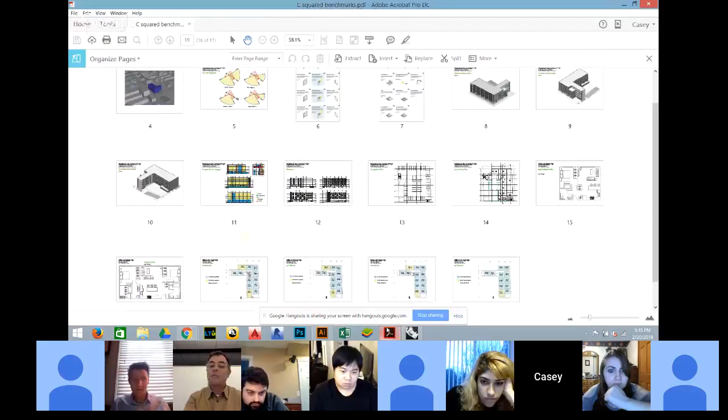So Caitlyn and Daniel are not muted. Can anyone hear me? Yes, you can hear me? Nathan can. Okay, I just don't know why my mic is saying I'm muted. But if you can hear me, that's good. I'm having trouble hearing Mark though. You're muted, correct? Mark is muted, yeah. Yeah, I can't hear Mark. Should I mute myself then? Yes.

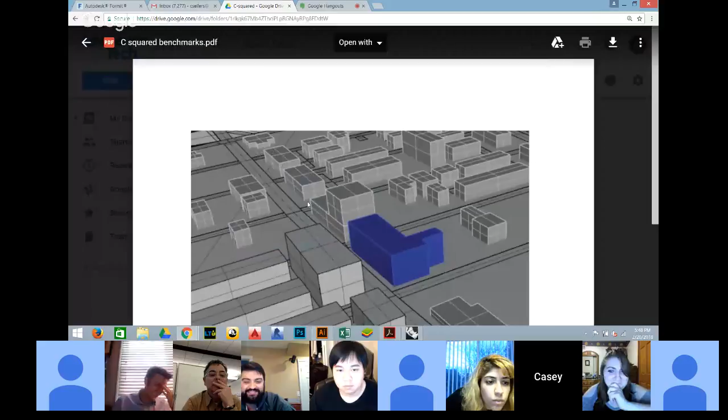Hello? There we are. Is anyone talking right now? I can't hear anything. Whoever is presenting should be unmuted, but their sound could be turned off. Casey has his presentation shared right now on his screen, but nothing. So he should be unmuted. Oh, did somebody mute him? Is he actually? Yeah, he's going through the slides. My, well, bad, we're going to start over. I think we got it. We can hear you now.

Start back, where am I at? Okay, so this is the conversation about how we wanted to lay out our building. What we decided was that we wanted a strong face on John R and Alfred, and then also a courtyard that the residents can use on the southeast or southwest side. So the most logical thing was to start off with an L-shaped building.

This is the initial mass model that we did, and going from there, we did a series of sun paths that show when the courtyard would be illuminated, when the east resident would get the morning sun. As I said, but no one heard, this is all in Revit, so it doesn't take into account buildings on the east side of John R.

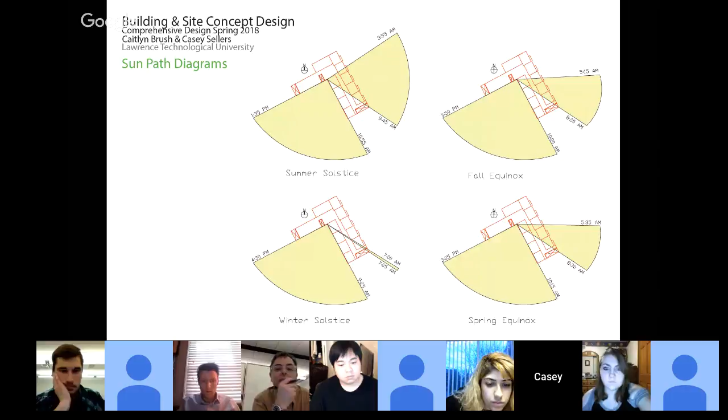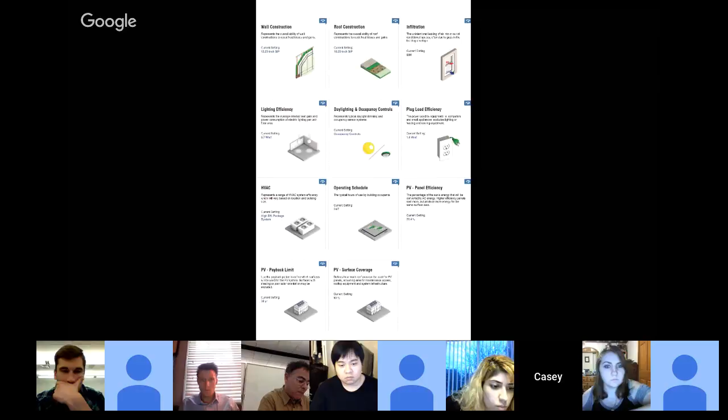These are 3 different axonometric views of our building. This is from the corner of John R and Alfred, this is Alfred, and then the residences on the west side, courtyard, and you can see the parking on the ground floor.

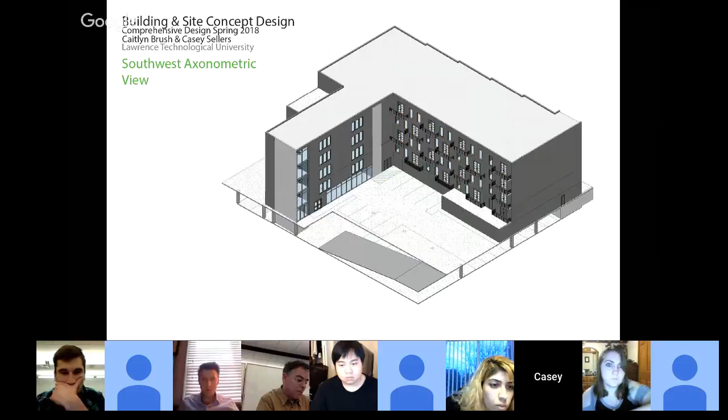And then these are elevations that I made from Revit that show the fenestration on each side of the building.

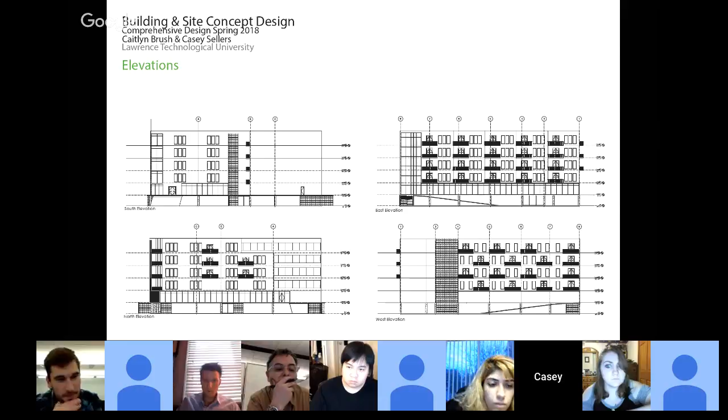And floor plans - this would be the garage floor plan. It's one-way, and there's 45 spaces in this. I didn't update this, but the columns on the west or east side of the building are in the middle of parking spaces, which I didn't count when I got 45. So there's 45 here, and as you saw earlier in the axon view, there's 8 on the ground floor - a total of 53 spots.

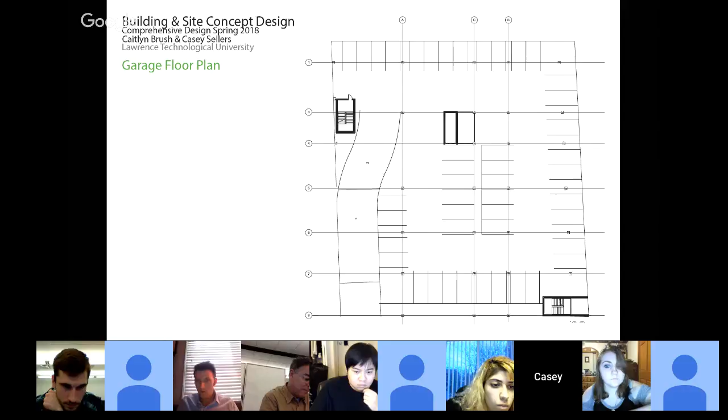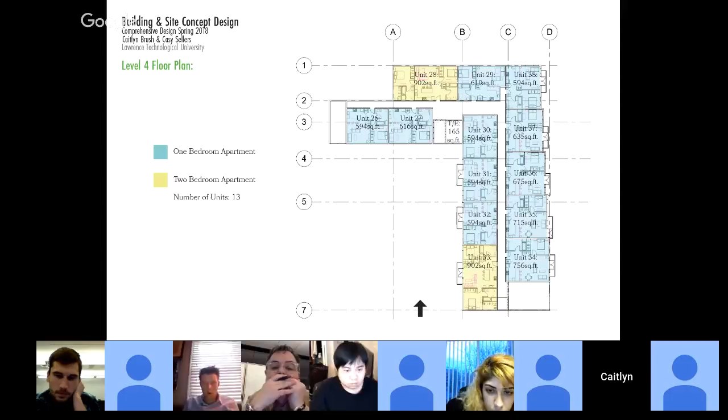This would be the 3rd floor with the dog washing again in the kind of armpit area of the floor plan. This is the 4th floor with the telephone and electrical space again in there. And then this would be the 5th floor plan. And then there would be outdoor terrace space in the area where that second 2-bedroom is on each of the other floors. It just didn't show up, I guess.

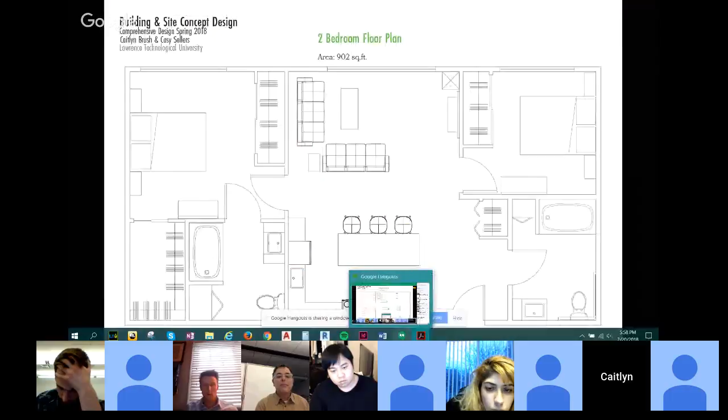Okay, so if you go back to your unit plan for a second, the 2-bedroom units, I think the bathroom door from the larger master suite should probably swing into the bathroom. Oh yeah, sorry, it is that way and all the... I feel like everything else is looking pretty comfortable, pretty reasonable. Although I think the X box that you've got, which I suspect is for your mechanical appliance, probably needs to be in its own wall construction, and that's going to have an impact on your elevations. So you need to think through the way that the Magic-Pak impacts your floor plan and also the elevations, because that's going to have a visual that's going to have to relate back to your fenestration strategy. If we go to the 1-bedroom unit, Mark,

Can I ask a quick question while we're on that? Is the lower closet by the refrigerator a pantry, or is that a hall closet? More of a pantry. Is the closet by the refrigerator a pantry or a coat closet, Caitlyn? It's a pantry, can you hear me? Yeah, it's a pantry.

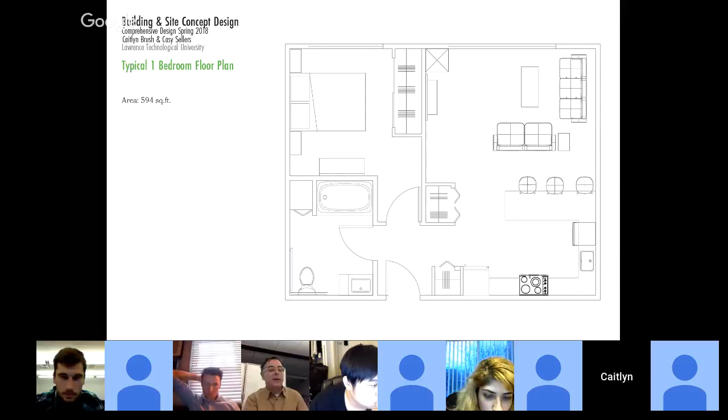As well as mechanical and fire suppression. So those are kind of next step reference points for you all to include in the planning.

And then if we go back to the overall unit plans, if we can go like to the typical third floor. So I think unit 17, can we go up one floor? 30, can we go up one floor? Yeah, level 4 or 5?

Unit 42, all three of those units are kind of crappy. Right, because, and I don't mean to be mean, but they are, right? Because you would not rent them - the bedroom is really the only room with fenestration, with outdoor windows.

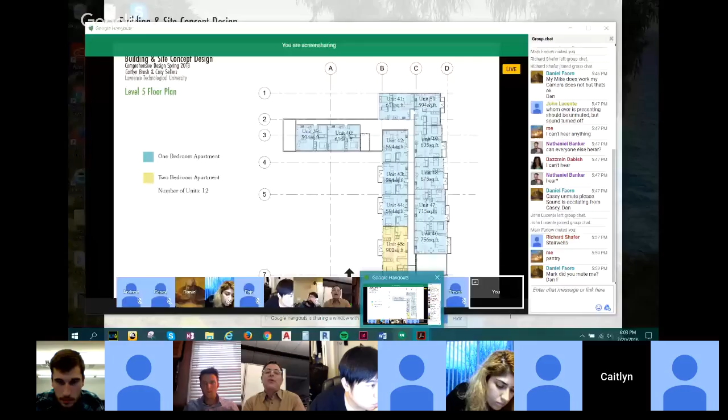Now that's not to say that we can't have a unit with only one window on the outside wall. I think we've seen, and we will continue to see, not only in our studio but in other studios, narrow and somewhat deep units.

But when a unit is chunky wide, like this one is, where we have the living realm - the living and kitchen realm - without any fenestration on it, then when you're studying that, you have to say, is that really a desirable unit? How can I make this work more effectively?

So maybe unit 42 is a studio unit, right? Or maybe it slides south and unit 45, for example, is a smaller unit. So those are the kinds of tests and examinations that as architects you'll go through.

I appreciate this as a snapshot in time, but I want to make sure that you see this as a red or yellow flag. And if you didn't catch this, or thought maybe we can talk about this tonight - we're talking about it, right? So I want to make sure you understand that concern.

Are you comfortable with that, Caitlyn? You follow what I'm saying? Yeah, no, I totally agree. Yeah. Mark - also, yeah, go ahead, Dan. I'm sorry, having trouble with my mic on and off.

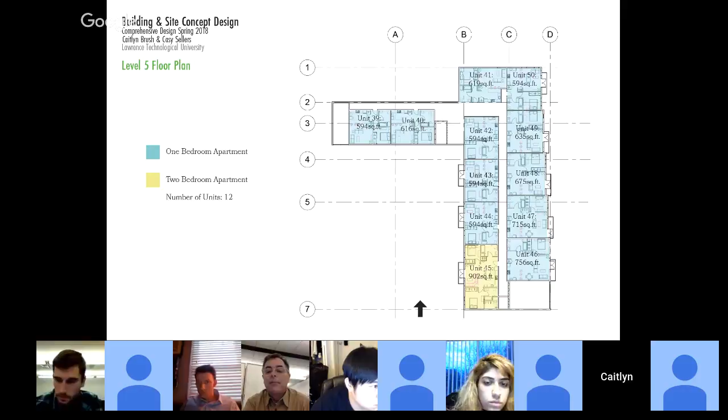Also maybe some diagrams might be missing right now for what the ADA requirements are for accessibility—in the elevators, or in public single-occupant toilets that you're indicating, or stairways, those kinds of spaces. I'm not seeing those things, and I want to be sure my inference is correct on that point. The point being that for the second benchmark, those factors will be looked for in your work. So make sure you're alert to that.

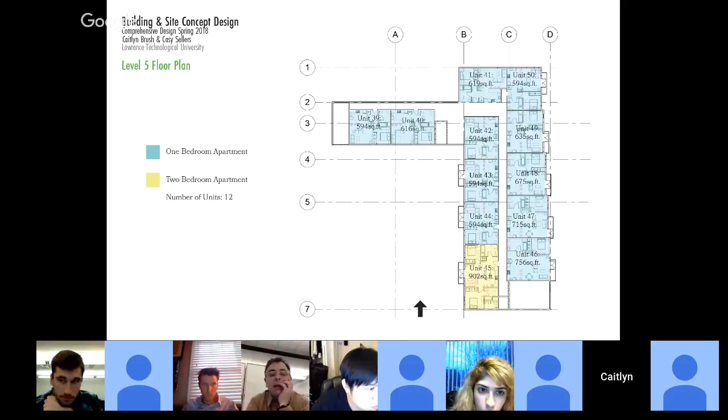I definitely appreciate the 3D sketches, but I'm wondering if there's maybe any other—I also appreciate the way Casey begins the presentation. If we can go back perhaps to that first plate—do we have to go back to you, Casey, to do that? Or can Caitlyn run it back to the very beginning? Yeah, so I appreciate this first drawing, thanks Caitlyn.

But it's not really clear how this form comes to be, and I feel like you need a set of diagrams that parse out the thinking that led you to this L-shaped conclusion. Can you move us to the very first plate? Actually, I don't think I—okay, so we can go to Casey. She does, yeah, I thought she did. Here we go.

Okay, so I think it's really important, you guys, to show a series of diagrams, and it can be from this view, for example, that show a buildable footprint that the zoning ordinance does allow for this site. So what is that volume? That volume can be this giant blue cube, and that blue cube is limited by an Alfred Street setback, and limited by a plane that indicates building height. So you should actually be illustrating with a package like this these kinds of drawings. This is not a technical kind of drawing—this is a design drawing you could have easily included here to help make your case.

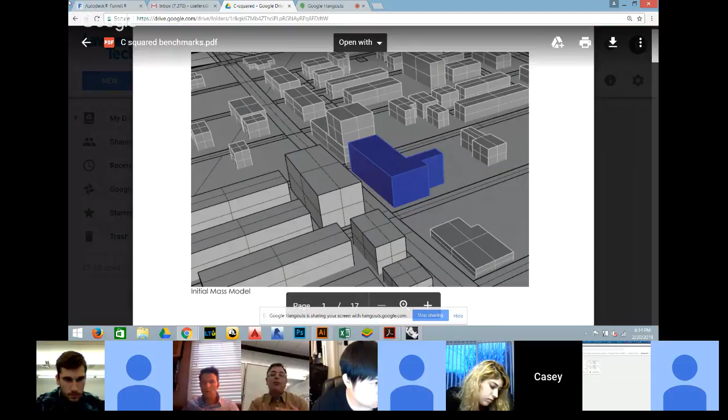And then you begin to show the variations or permutations of this drawing by showing the idea of a courtyard, letting that volume slide out of the big blue volume, let it rise vertically out into the sky, so we begin to see the benefit of a courtyard that provides daylight and opportunities for views. These are not necessarily constructional or technical diagrams, but I think they tell the story for a developer to help them understand how your idea came to be. It's really important that you start to think about your work as this logical, conclusive, step-by-step, iterative process.

Dan, do you want to make any closing remarks? We're actually sort of out of time.

Yeah, I mean, I agree with the importance of diagramming—I can't tell you how many times on a jury someone basically has to go back to the beginning because they can't understand the origin and the initial concepts that are developing the project. So if you can do that at the very beginning, and do it in a very clear way, I think you set yourself up for a good start with your presentation, because now your jury members are following along rather than saying, hey, I don't quite get this.

Can we take a quick look at that one floor plan that you showed us? I think it was a 1-bedroom unit. I have a quick question for Professor Farlow.

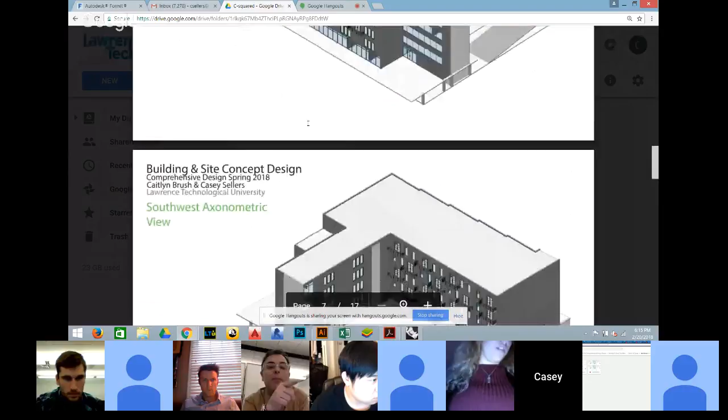That might be on hers. Oh, thanks. It's the one, right there.

My question is on the HVAC unit that's on the exterior wall. Since we're going to see this a number of times, I'll ask now: what would your thoughts have been about moving that bedroom wall further to the right, to some extent, and sliding that HVAC unit into the closet zone, so it's not chunked out of the living space? Yeah, I think that's actually a desirable thing.

Caitlin and Casey, these plans are kind of platonic, right? They're ideal—they don't show the corridor, or the relationship of this unit and its bedroom to the living room or the bedroom in the unit to the left and right. They're just pure drawings, they don't even have the balcony on them. I feel like you can contextualize these plans a bit more, because you'll want the balcony indicated on the living room, and seeing that balcony may cause you to conclude, like Professor Farrow just indicated, that the living room looks kind of funky now with this zig and zag in the corner. Wonder if there's a way the closet can swallow it, which is also why I'm interested in finding other ways of identifying storage in some of these units. So, for what that's worth.

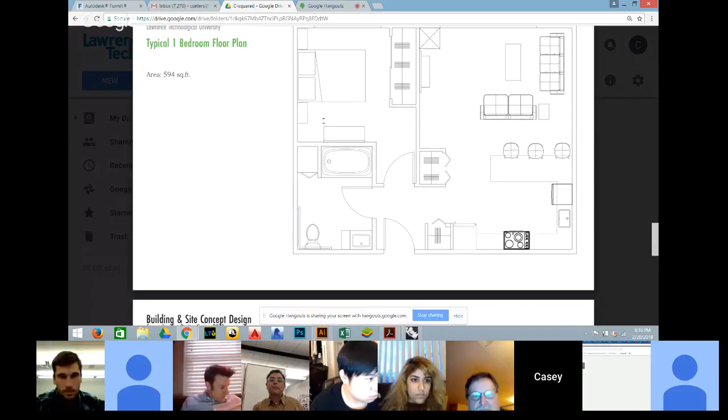That's a good suggestion. Okay, that's all I have for now. Thank you. Can we just go back to the ground floor?

It seems pretty reasonable. Some of the paint stripes need to, like at A1, run across so it's always clear that that isn't a parking place. Wherever that happens, like at A6, and so on, B7 or B3, whatever that is.

Also indicate the graphical directional arrows, everyone, and the slope of the ramp needs to have the stair cut—that line with the zigzag in it to indicate that it goes up—and note that some of the stuff in this ground floor plan is maybe programmed underneath the ramp, if there is program there.

I think the other point about making sure the A column line, Caitlin, starts on the west wall and not somewhere in the middle of the building will be useful. Make sure the doors in the lower level stairs swing in, everyone, and make sure the stairs have doors—the southeast stair does not have a door. We've talked about this before, and I had hoped you would have caught that by now. So make sure the paint is indicated, the column lines are indicated, the stairs are provided with egress doors, and also make sure that—

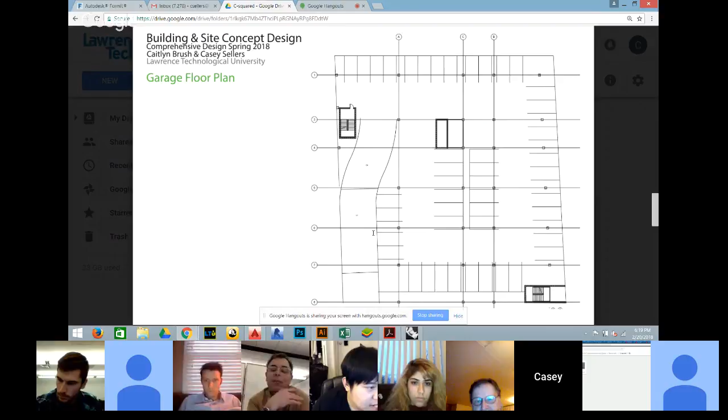And maybe—I know you guys are working these drawings out at, like if this was in AutoCAD, it might be in an LT scale of 48, because this is a quarter scale drawing.

It's really hard to read the nomenclature of the drawing, like A and 3 and so on. So just double the size of those column bubbles so we can read them, or override them.

Also, they're not correct because there's a column that doesn't have a bubble, as pointed out. The column on the far right-hand side without the bubble, my concern is that's going to be in a location where the car door opening is going to be a problem. They may wind up hitting the column when they're trying to open the door. Does that make sense?

We've talked about that before. And I think there's probably a generator down here, unless you located it on the first floor. Okay, thanks. Let's move on to the next group.

Thank you. Who's next? Me and Andrew. Who's going to lead? I can present, or screen share. And we do have a copy of our slide in the folder as well if you wanted to look at it by yourself. Thanks, Andrew.

Okay, so here's our proposal. Ready? Okay, go ahead. I'm Dazzmin, and that's Andrew.

So basically, as you all know, the amenities provided within this space include some exterior green space, about 50 residential units, underground parking for them, attached storefronts, and then the fitness center, which we're incorporating for residents and non-residents.

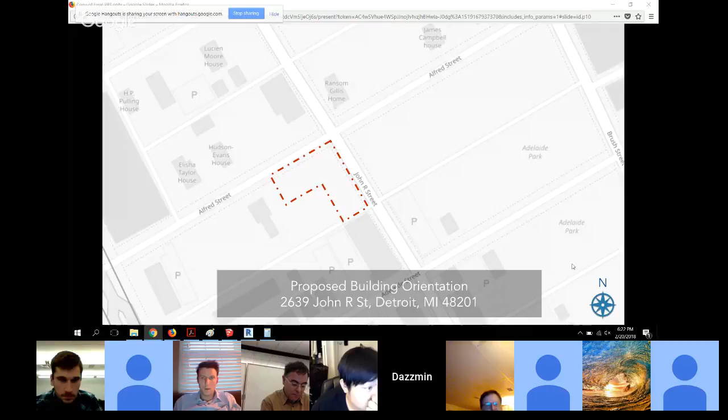So this one right here for the building orientation shows the sun path for the orientation, with the apartment unit facades facing the northeast and the northwest. The little chart on the bottom left for the benchmark comparison is from another class we're in, showing where the building falls out—not many specifications yet, but on average with the placement—against ASHRAE 90.1 and Architecture 2030. You can see the rating for them goes from 6.4 to 29.4. We're closer to ASHRAE 90.1 without figuring in the HVAC and everything, but according to the sunlight and the way it's positioned in the location, it shows we're within the area we want to be.

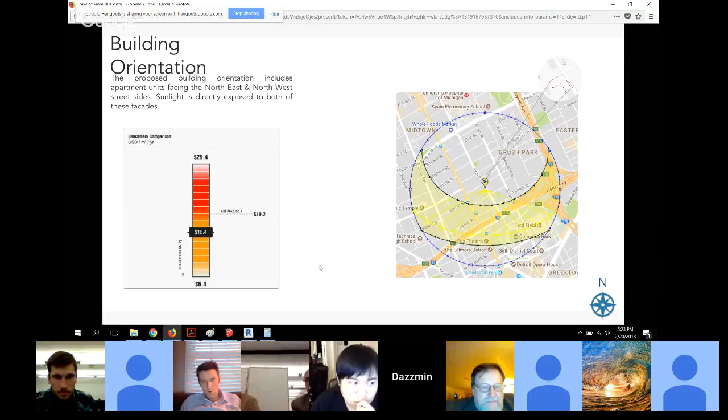Okay, and then we have a structural system that we picked out from the list that was given: the Delta Beam Slim Floor Structural System. And we've got the HVAC incorporated in each unit, a little 30 by 30 Magic-Pak. The structural system helps maximize space since it's so thin, and the air conditioning unit is more flexible going from unit to unit, and easier to separate the bills from apartment to apartment.

For the window to wall ratio, we looked at the massing we showed before with the ASHRAE specifications. This shows how the building is positioned on each facade—north, south, east, and west—and how it would interact with the sun, which would impact the daylighting, heating, and cooling. These charts specify the cost and efficiency according to the percentage of opening. If you look at the first chart, it shows that at 90% open, it's not as efficient, or how it could be more or less efficient depending on the area it's on.

Right, but they also highlight the 40%? Correct, the 40% is the one we modeled inside the program, so that's why it's highlighted—that's what we chose. The other ones are their suggestions also. So that's basically meeting the ASHRAE recommendation as of right now with the placement, but that's without figuring in the HVAC system or any other systems. Right, but that's percent glazing, is it not? Correct, it is. And that is what your building has? Correct.

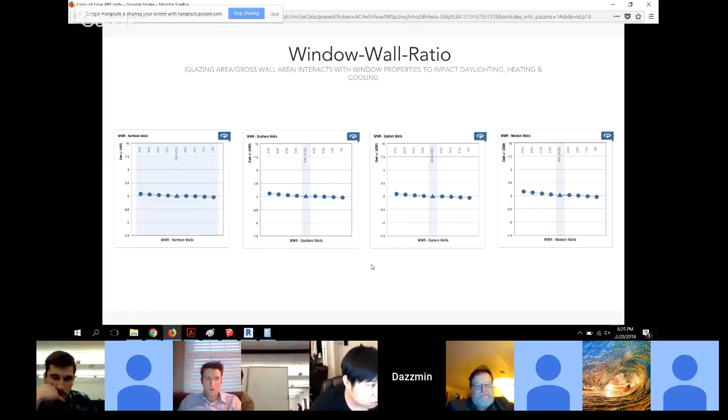I'm not sure if we fully decided. I know we were doing the metal framing for the exterior. I think that had to do with the consistent insulation, that board that gets taped together. I'm not sure the specific name for it.

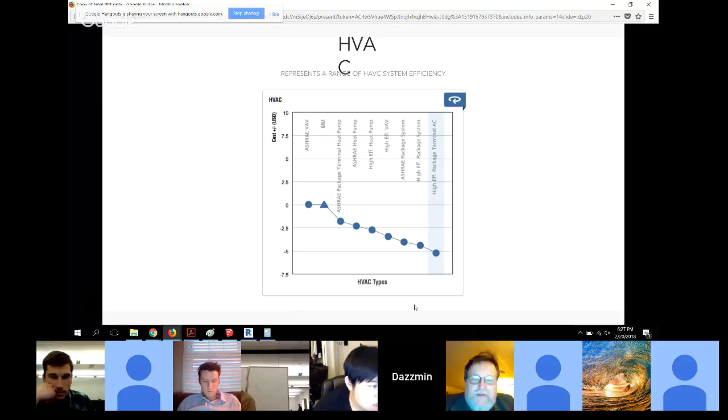Okay, we'll look into that for sure.

Okay, and then we've got the plans and layout. These are not fully done yet, but they're the overall structural and conceptual images for the building. But we could skip to the floor plans, and those show more in depth what these will be updated to in the future.

Yeah, so here's the elevations that we've got set up, just showing the overall building. So we've got the underground.

On the underground level, you can see the ramp to enter on the left side, the bottom left. And we did 45-degree parking for these cars to help maximize space and also help with where the columns fall out. There is one column we're still working on moving around, in the top, that big open space there. We're trying to work that in. The other ones do line up properly, though, so far.

You can see the egress for the staircase is on the top left of the image and the bottom right, and the elevator is in about the top center area. And, of course, the ramp section's on there with the 5% grade on the bottom and the top, and the 13% grade in the middle for the ramp.

How many units or parking stalls are there? I believe there were 45 at first, but I think we're going to have to move some with the column placement once we get that one that's missing.

Is there a handicap stall here? The handicap is above, yeah, they're on the ground floor level, which we'll show next.

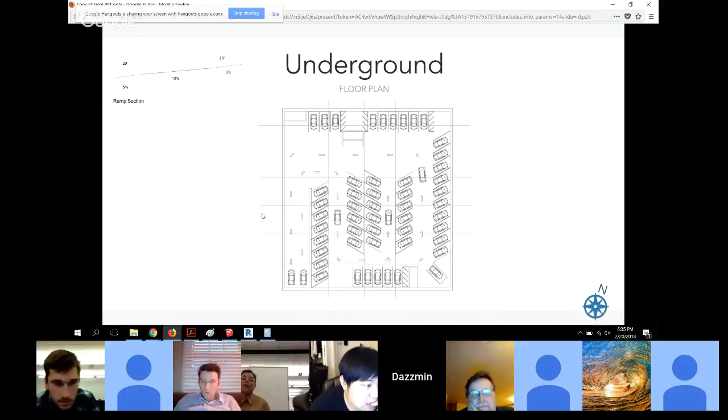Okay, so let's look at those because we haven't even gotten into it and we're already into the discussion period. I think there's 3 slides left total, but that's understood about the coding and the floor plan layout that you mentioned. Good, thank you. Can you go on to the next plan?

Okay, so standpipes usually happen in the stairwell, Dazzmin. Right. But meters and things like that could go into that space. I'm not sure what... what's happening in dining? What room is that?

Andrew, that's right by the outdoor space. That's just a dining area for the residents, basically like a private area where they could overlook the outdoor space while they're in that space. So it's not really a place you could go from off the street, but it's more for residents only to be in. I guess I'd have to know more about the outdoor space and how good it was, because I'm not seeing windows into it from the dining room.

Is that different and on top of the amenity or community space that we asked you to provide? It's kind of an added option since we had a little room there, and we weren't sure if we were going to do a door from the outside space into there, if that would make unwanted people accessing the area without going through the lobby, or if we should just put windows. So we're kind of stuck there on what we should do if we utilize that dining.

I think we can work together to tighten up that plan. I think any developer would want that footprint to be as lean as possible, and doing an extra program there wouldn't bode well. The same comments earlier about parking graphics need to be stated here as well. We have 2 large electrical rooms here too.

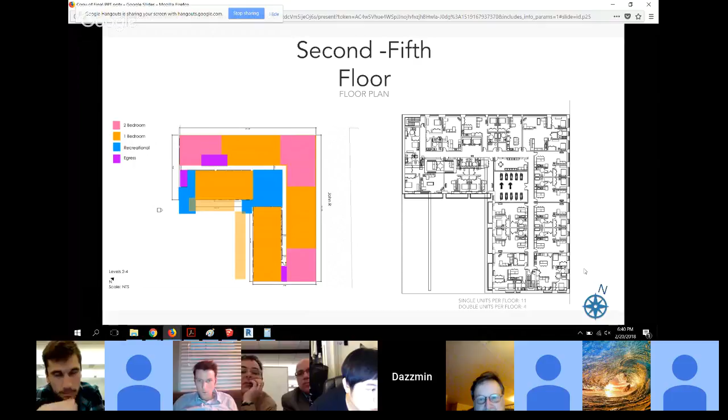Can we go back to the 2-bedroom? So I'm not sure which is the better bedroom, but it might make sense to try. So how large is the 2-bedroom? Do you have an area indicated on that plan? I don't. I've got it for the 1-bedroom, but I didn't do the 2-bedroom ones.

So I think you need to indicate that the long bedroom has no bathroom, and it might be that what you try to do is in that area where you've got the closet and the bureau, maybe that's a good place to put the closet and the bathroom.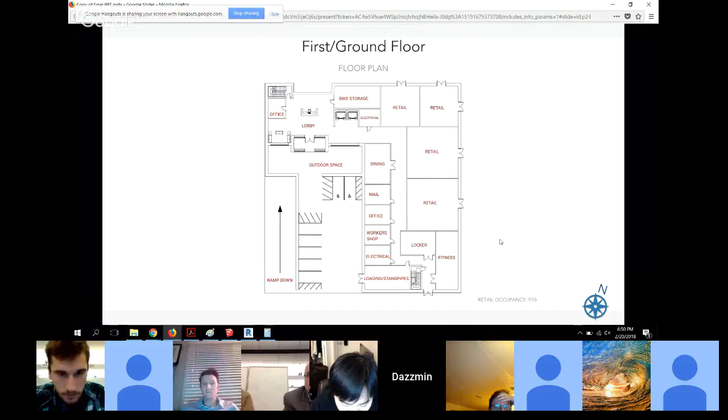So occupant load is the calculation, and it would help to know how you got that number. That seems high - 970? I used an online tutorial on how to calculate it for the space. If you can promise me a tax return done the same way, I'm going to have you do my taxes.

I think if you break out the uses, do the individual calculations and summarize them, you're going to come up with a smaller number. Probably.

Okay, what else do you want to show us? You've got a couple minutes. That's everything, I believe. We went through all the slides, yeah.

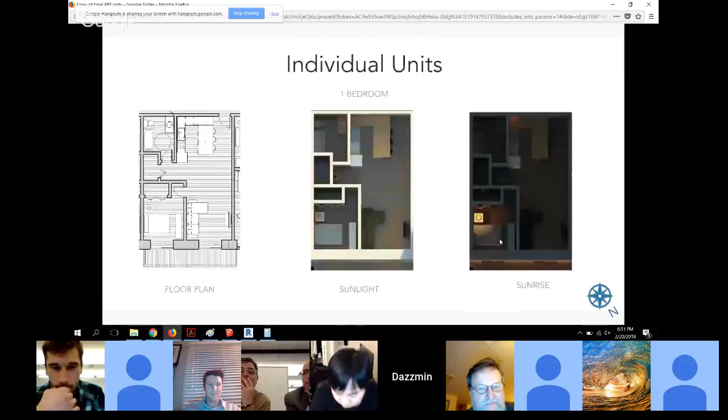Can we go back to the elevations? And of course, we'll add the balconies on the east side and the north side. So thank you for the elevations. I'm not seeing sections yet. Is that correct? Correct.

Okay, so for the elevations, I want you to print them out to scale and start to draw them as overlays, and try to look at the elevations as an opportunity to discuss the way this architecture fits into the community, a community of more vertically grained conditions, and not these horizontally stacked office buildings like Southfield.

I think it's really important that your architecture read and behave as if it's a residential typology and not a commercial typology. Even though it has commercial uses, even though you have a commercial building code applying heavily to you, this is first and foremost a residential building.

And it's really hard to do this, you guys. I'm talking to all of you, that one of the ways of looking at how to approach this is to break the building into increments or segments.

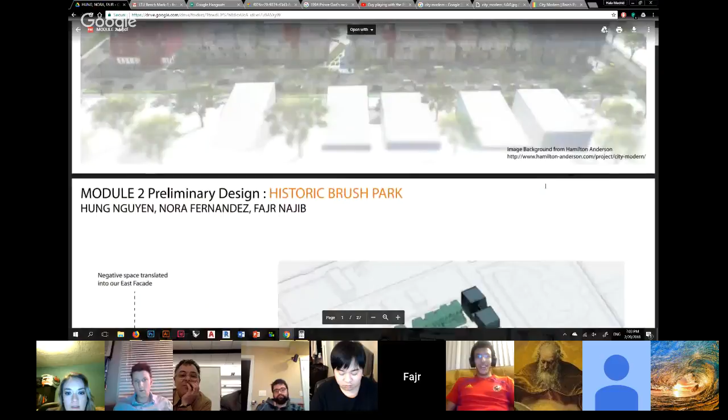So the second slide, we're trying to discuss what we were thinking of in terms of a specific facade on our building, which you'll see in the floor plans and elevations. We took inspiration from the flats across from us on the same street, John R. These two buildings have a staggered elevation, and we're taking that negative space and using it on our east facade, which we'll see eventually.

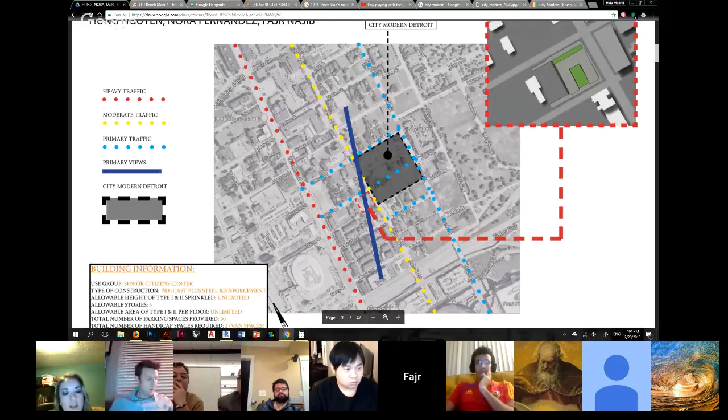Next slide. Yes, so I created a site analysis and did a little bit for the flow of traffic, showing the heavy traffic, moderate, primary, and also the primary views, the location of City Modern Detroit, and a little bit of information on what the building is going to be and what type of construction we're thinking of doing. We ended up choosing precast concrete panels and also steel reinforcement. We know that the building is supposed to be 5 stories. It's going to be for a senior citizen center, and that's part of our programming. We have 50 parking spaces.

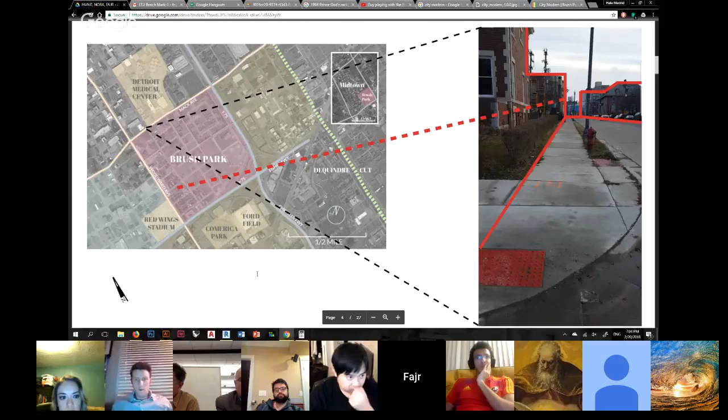If you can go to the next slide. We also created this site analysis to illustrate a little bit of the streetscape that is going to be in that area. You can go to the next slide.

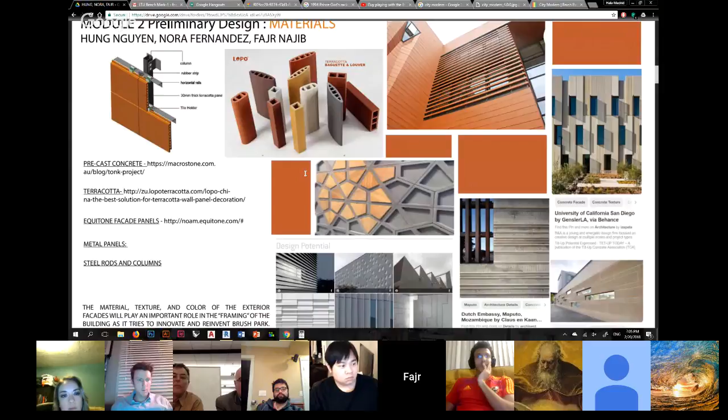We did a little bit of research on the type of materials that we wanted to incorporate into our building, and we decided to add a mix of materials on the exterior. We decided to go with the precast concrete and the terracotta panels, and a mix of those with Equitone facade panels. It's just an illustration of what we did our research on. Here's another image and information on some of those terracotta facades and the baguettes.

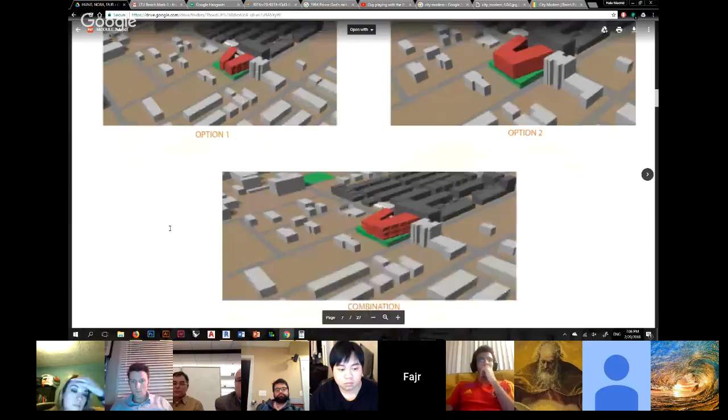Okay, so these are just early iterations of what we're thinking of in terms of how to orient the building, how to split it up, and how to have the facades act in terms of the units they are incorporating. We kept that U shape, rotated it, and took inspiration from the facades that are staggered and poking out.

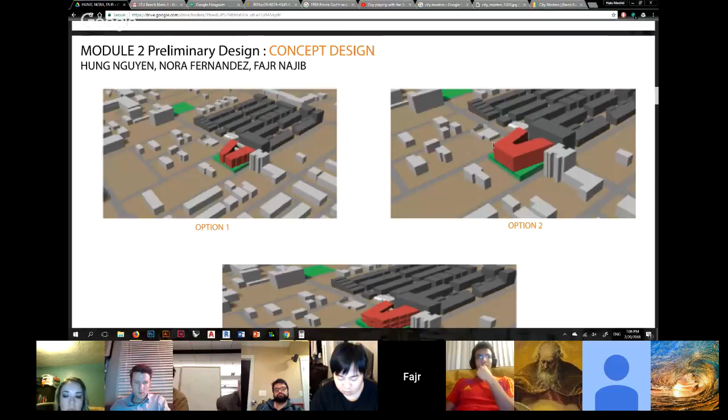Can you back up a minute? Which way is north on these axonometrics? North is this way. Sorry, this way? So that way, up and to the right? Up into the left upper corner. Up and to the left is north? Yeah. Okay, I really would hope that we could get north arrows and street names on some of these, just to keep orientation clear. Thank you.

We also did a little bit of research on the bioclimatic analysis. This was a bit of a challenge and confusing for us, but we got some of the information from the book, and it gave us the building orientation and the surface-to-volume ratio of the building. This is so far what we've gathered on that.

Okay, before you keep going, let's talk about this. Do you see the U-shaped or C-shaped plan in the middle to the right here? Yes. Do you see that the courtyard faces south, correct? Right. Does your courtyard face south? No. Yes. Okay, so that's one thing you need to understand — you're not in alignment there. Second, to understand this better, do you see that little slider bar beneath the picture? You notice what you showed us is on the far right, saying poor, ratio of surface area to volume 2.3, right? When you slide that slider bar, like we did in the presentation I gave a couple weeks ago, you wait for it to hit ideal, and that's the number you're looking for. These are not unimportant — they're fundamental to understanding what this reference is telling you. Mm-hmm, yeah, totally, we're glad you mentioned it because we're not entirely sure how to make it work. Thank you. If you want to go over this again, send me an email with a question.

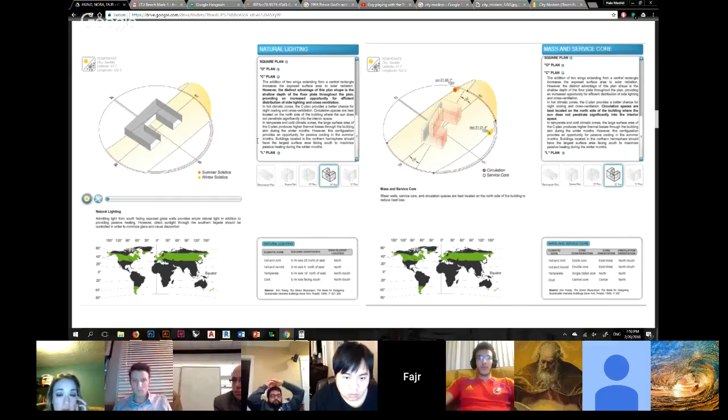Is that meant to be cantilevered like that? No. Okay, there is—it's just the way the facade is, those specific legs are like that, yeah. Okay, go ahead.

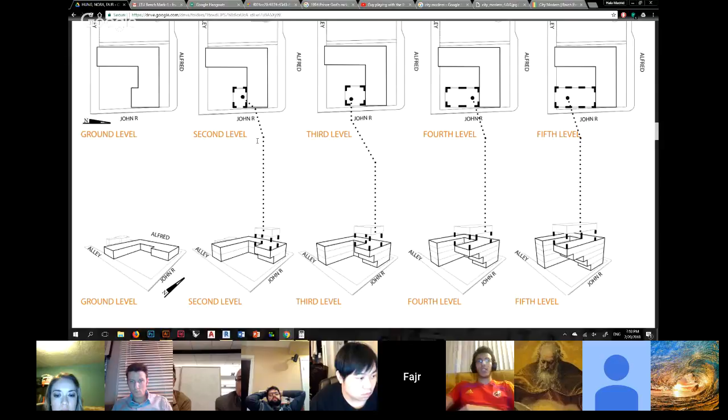I guess a couple of questions for everyone: you again have the 90-degree, or 180, turn at the entry, and you need to tell us that works, and prove that it works.

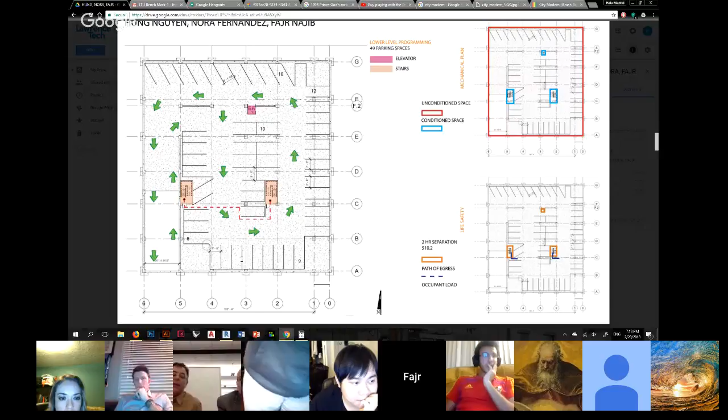The problem is that you're not being copious or meticulous about your design work. I want you to get into that mode. I want someone to own the role of job captain to make sure this stuff's getting done when we have these critiques.

And I don't understand the difference between F and F2. They look like they're 4 feet apart. You understand? 4 feet apart. Yeah. I mean, why not stay with F2 and drop F?

Okay, and the stair doors on the lower level need to swing into the stairway, right? So I appreciate the travel distance calculation, but again, you have to think about what's happening down there during a catastrophe—when there's a fire event or a smoke event, we're going to scramble. It's a little thing, like the door swinging into the direction of egress, but if you're showing these drawings to the building official, whose job is to flag that stuff because she gets paid to do it, she's going to eat you alive, right? So you want to make sure you beat her at her game, and that you're meticulous about that stuff.

I like everything graphically about this drawing except the Christmas arrows. If they're green, I don't mind that, but maybe they should only be 30% in value, not 100%, because right now it's the most important thing on the drawing, and it shouldn't be. The most important thing on the drawing is the parking and the structural.

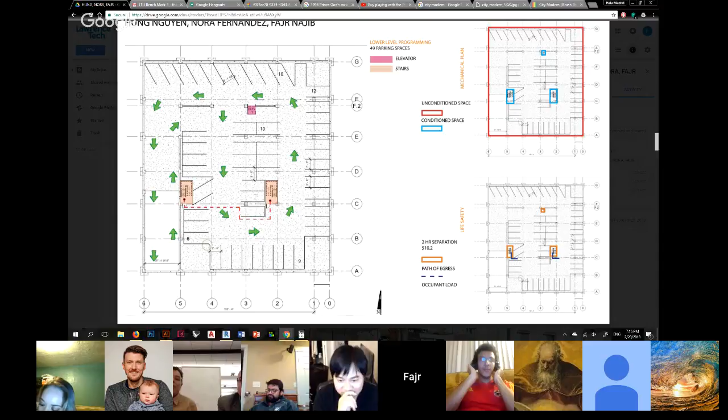Let's go upstairs. I now love how we move upstairs, you have load and the fire separation. Go ahead, I'm just complimenting you.

I have a question for Professor Farlow. Lower right-hand corner, bicycle storage, bicycle dog wash - is that a desirable retail exposure? They have a lot of street frontage, but only about 3,000 square feet of retail to provide for, so inevitably they have to decide where entrances, community spaces, and commercial spaces that seem appropriate for street frontage can go. This group has been, I think, steadfast about the idea that bicycle storage and bicycle repair is a positive thing to message to the street.

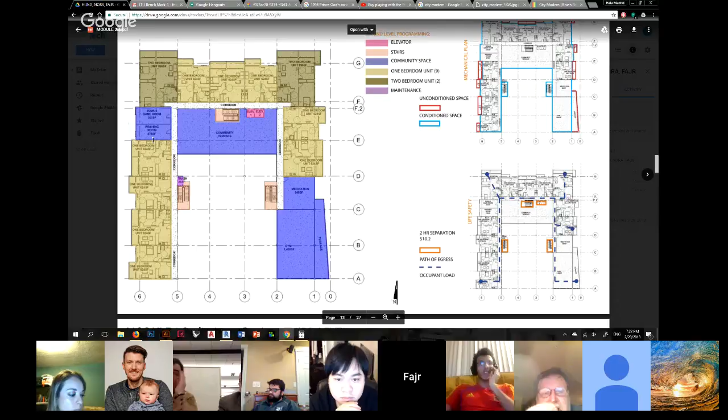Me or Hung? Whoever was speaking. Oh, do you just want us to go ahead to the next slide? Yeah, I'm sorry, go ahead. Oh, okay. Well, then the next slide, it's pretty much the same floors, but repeating.

But you will see how that space, where the gym and the meditation room are, keeps shrinking, and that's where the growth kind of happens, which pushes that amenity space out to accommodate the units. And the facades of those spaces are different, and that's where it shows from the exterior.

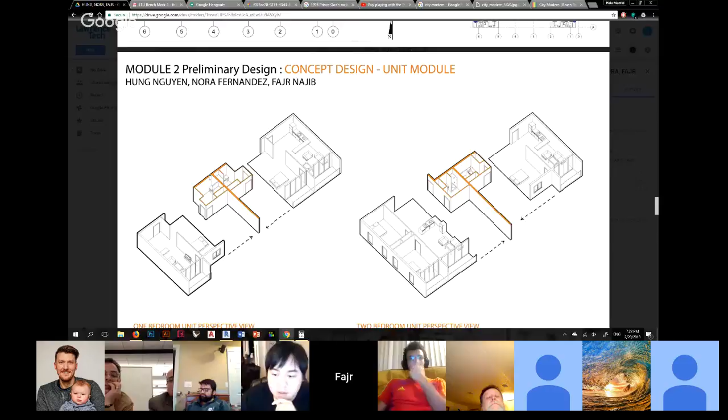And these are the units. But let me share my screen. Okay. Okay, Hung.

So this is the unit module we came up with. We changed it quite a bit from the very beginning module. We still keep the basic idea that we try to cram as much of the wet units together so we can share the same pipeline, with the bathrooms back to back to each other, and the kitchen area back to each other.

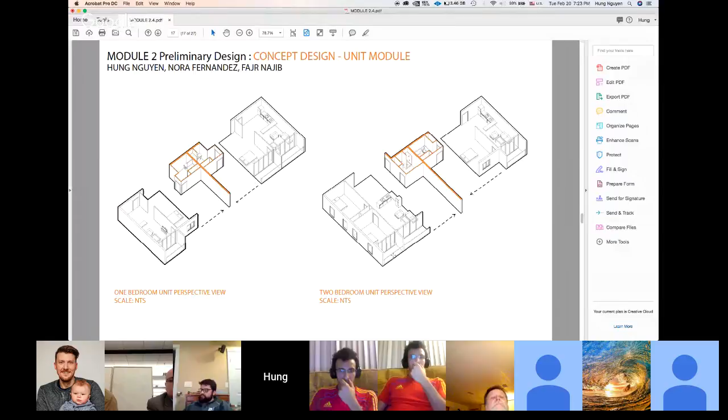So that's the 1 bedroom unit, and that's the 2 bedroom unit. For this 1 bedroom unit, from last presentation, taking Mark's input, we increased the closet size and reduced the size of the bedrooms. We'll still keep a small closet, but for this single bedroom floor plan, the bedroom that doesn't have a balcony has a walk-in closet. We tried to design the space so it can meet ADA requirements for wheelchair accessibility in the bathroom and bedroom, and for moving around inside the living room from the kitchen and living room.

So my question for Professor Farlow is, in that unit on the left, I have a living room that's 11 feet 7 wide, and I have a bedroom that's 11 feet 7 inches wide. Is that okay, or is that proportion perhaps not what it should be?

I think I've always suggested that the living room should have the preferred wider dimension, even if it's only 1 foot. It makes a difference, even in a 1 bedroom unit. I think the 1 bedroom is moving in the right direction, Hung, but I still think it's too big for everything else that we've just talked about, and the fact that it shares a width equal to the living room gives you some latitude to reduce that a little bit.

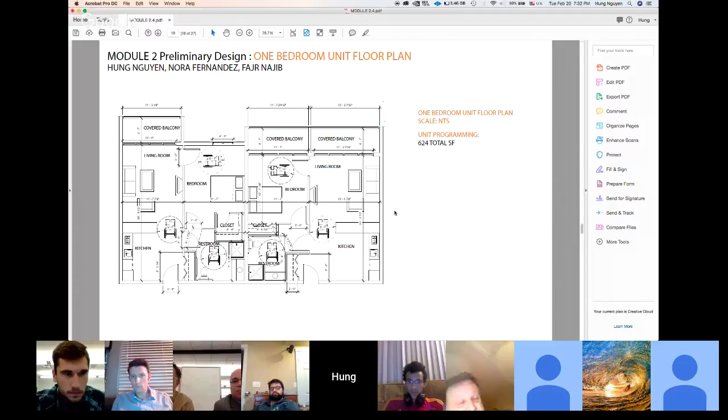That will make the design so much easier. So we can do the 2-bedroom or the 1-bedroom as ADA - would that be split? If you have a 1-bedroom and a 2-bedroom in your development, you have to have an ADA unit for each type. So you're not really providing access otherwise. That's right.

Okay, I'm sorry, go ahead. We're gonna have to wrap up shortly. Do you have anything else? Because we've not really had any time to comment.

Well, pretty much the same thing about the 2-bedroom unit. We've got 2 bedrooms, 2 walk-in closets. The left room is exactly the same. This one, the living room is a little bit bigger than the bedrooms, since they share the space with the kitchen. But same input view from the previous slide, so I think I can apply that to this one.

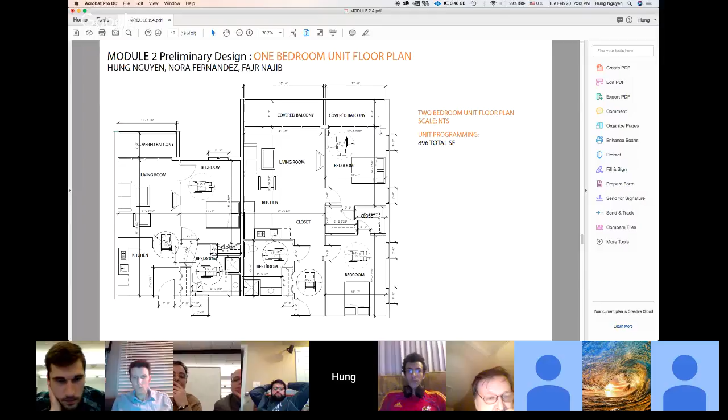You have any input on that? Well, I'll just say my last comment. Since you picked precast concrete, that's a very specific system.

You need to look at those references, the hyperlinks that I embedded in the assignment, and someone needs to really understand how precast construction elements go together and what are the standard elements. It is a kit of parts, and they have very specific rules. Does that make sense?

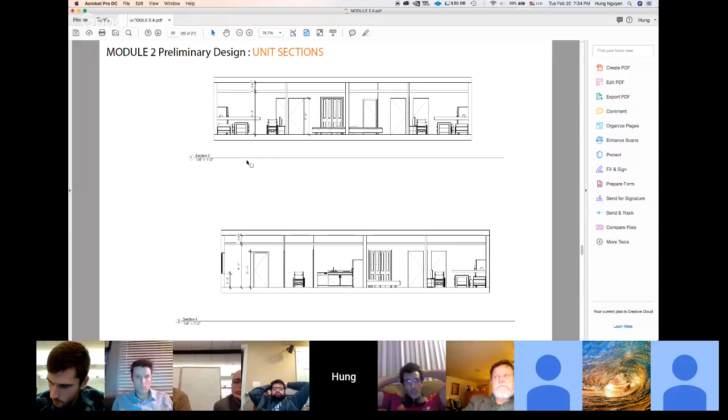Yes, actually, we were wondering, could we have steel incorporated into that with precast concrete? I think one of the options, the Delta Beam one, had the hollow core as the secondary spanning element, and the Delta Beams are steel, and they're the primaries, and I think you have steel columns with them too, correct? Yes, that's correct. So that might be another approach, a hybrid that may work better.

So you said Delta Beams? Yeah, one of the options has a Delta Beam, and I believe those are steel columns, steel primary girders, but the secondary is the precast, which is the slab. Maybe that's option 3A, because there were like 2 options for concrete. I don't have it off the top of my head, but I believe it's there. I'll pull it up. You might want to look at that carefully before you make your final decision.

And probably with precast, you're going to run into an issue that Professor Farlow's talked about. It may not be the most efficient for minimizing floor-to-floor heights, depending upon how you use that. You'd want to use what are called inverted T-beams or inverted L-beams for that to be more compact.

Okay, so I'll just quickly run down the rest of the presentation. Elevations, four sides, section cut of the building, so you can see how the stepping comes up. This quick duct system running to the typical floor.

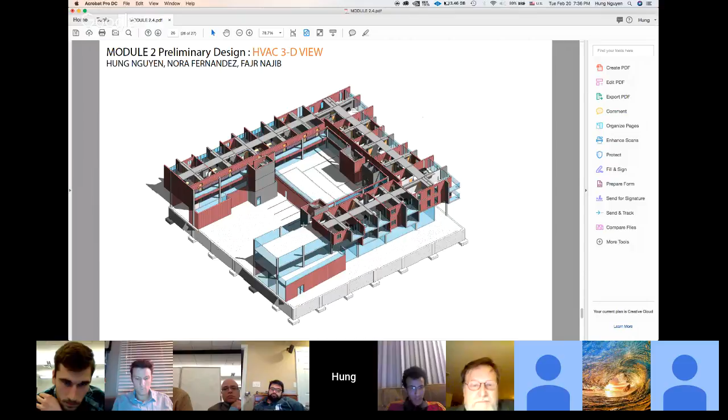What was your HVAC system? That's option number 3. What was that one again, Parker? It was the exterior. I'm looking at it. Self-contained packaged air-based units for heating and cooling.

Just again, it may be worthwhile for someone to take ownership of something like HVAC and make sure they become the team expert. Does that make sense?

Okay, but I'm glad it's fleshing out. I actually like the 3-dimensional quality of this because it's really starting to show how this is becoming a volume and a form. And lastly, just a render of the building. That'll conclude our presentation. Thank you.

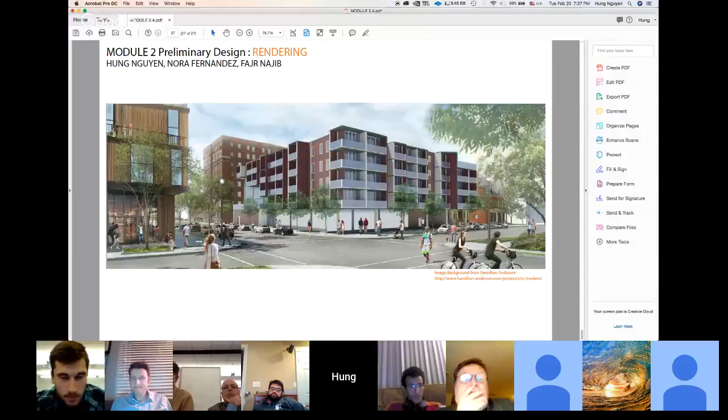Dan, do you want to start off? I sprinkled a lot in there along the way about the structure and mechanical and things, so I'll let you take over. My only other comment would be about the exterior material choices you have. You might want to be careful to think about how many different materials you have on the exterior. I think your initial earlier slide showed quite a few of them.

Some really successful projects are done with not very many material choices. David Chipperfield is one architect that does that. Professor Farlow probably knows Stanley Saitowitz's work, one of my favorites. There might be some lessons to learn from that.

The other material choice I thought was intriguing is that you chose TerraClad. It's interesting because it can be a solid, it can be like a balcony balustrade, it can be a louver. So if you have an HVAC unit on the outside and want a louver vent, you can use that system to provide that. And if you need louvers for shading, say a south face or west face, to shade some glazing units, it has a louver option as well. So it becomes many different elements on the facade you can use, rather than most materials where you sort of have one choice.

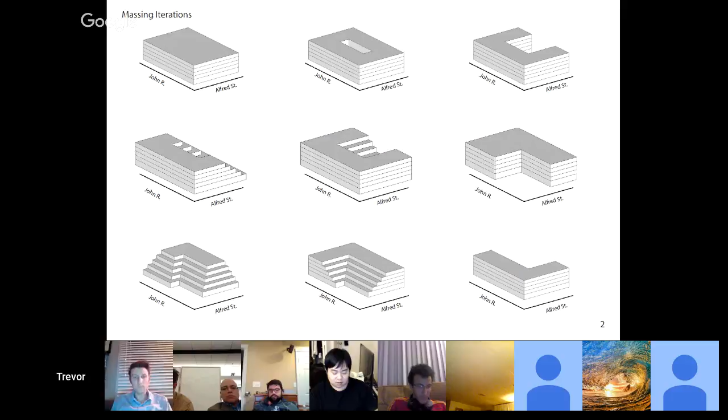And so in these three diagrams, as I've mentioned before, adjacent buildings are also a factor on the frontage on our street, and we allowed that to set the lines at which we stop our facades and respect those neighbors already in the area, along with the site conditions given by the program brief and the setbacks also reflected in the program brief.

I talked about the other day, and although our bias for the L-shaped building didn't originate based on bioclimatic conditions, it kind of just so happened we picked a building that then benefited from a good amount of natural daylight, having a lot of exposure to the east and west sides, and then that courtyard, probably a little easier to see. So this east side, and then this on the west side, a lot of opportunities there, and in the courtyard area here for some natural daylight as well.

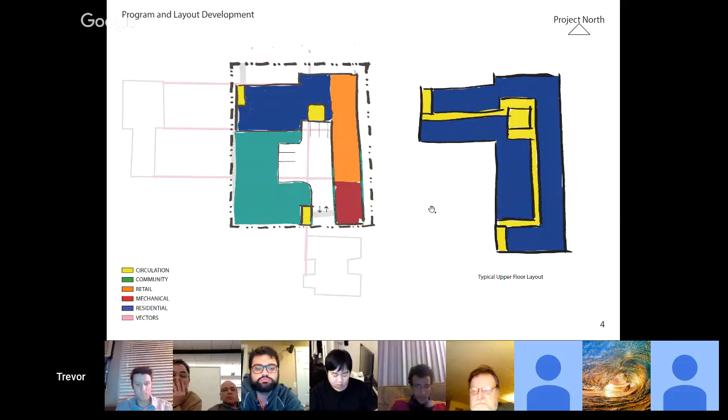And then these diagrams, slightly from the last time, show that carrying through and still relevant in our first floor program. These are the same diagrams too, in 3 dimensions, and this is our vertical, this is the horizontal.

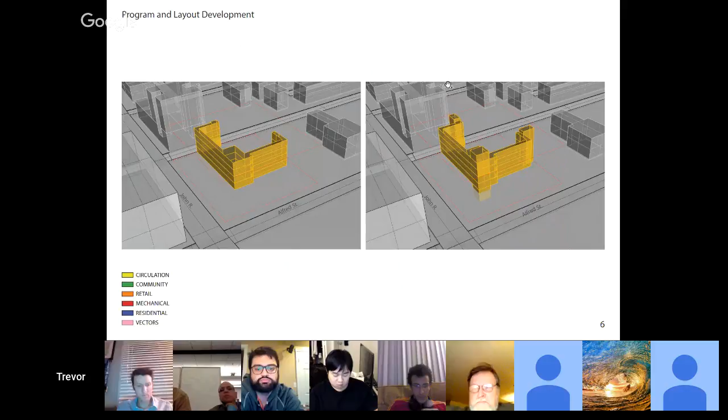You can see here's John R, and here, and this is a synthetic of those two. And then we started to sprinkle in this space that we wanted to look across the street to the Ransom Gillis house. See here to our vectors, and the line work continues over to suggest that we're not going to protrude past those neighboring buildings that are adjacent to the site.

This synthetic drawing with the blue on the typical upper floors, modeling the residential units, and here we have overall the orange representing the retail spaces that we wanted to make sure along John R. And then a nice secondary street so that we could pull different types of traffic, pedestrian and vehicle, respectively, to Alfred and John R, organize it in, and not have conflict of pedestrian interest with vehicle interest trying to enter the parking garage or the parking floor off of the alley right here.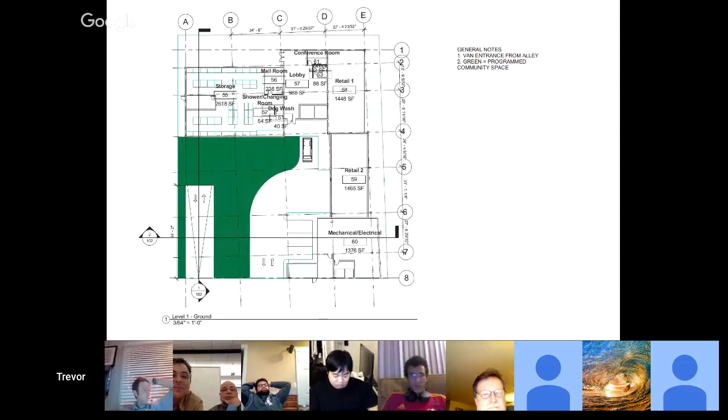Moving on from that, some overall building sections that'll continue to be developed on the first floor, then all the mechanical falling around that, and then the residential above as we started looking at in the 3D views. For unit layouts, our column grid being an angled, shaped building, we started to introduce balconies, which actually faced us with an issue of having 13 sized units.

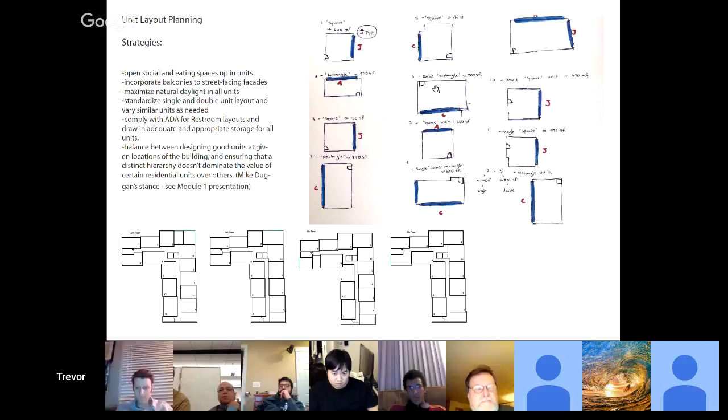So this needs a little bit more development. Our strategy was exactly what our next steps are supposed to be: optimizing our opportunities to best use the side of each unit, whether it's adjacent to John R, which is represented with a J, or the courtyard, with a C. So we know that needs work, but rather than try to do 13 units right now, which would probably all need a lot of work, we want to try and develop a single and a double unit based on how each unit changes on top of that.

Alec could speak more on this if he were here, but a bit of the HVAC and how it's distributed, and then I'll collect here down to our mechanical room, which is on the first floor.

And then structure, this is still being worked out—we have concrete columns, precast, on the underground floor. I think we're anticipating that we can span more generously because that courtyard doesn't have stuff. I guess, Professor, we could talk to you a little bit about this as we continue, or Mark as well—anybody who can offer input would be helpful. Right now this span at those areas, like part of this L where the ramp goes down, we're idealizing that we can go a little bit further, with 4 or 5 stories of residential above.

We didn't get into specific material combinations for the exterior, but rather than do that, we started to look at just a composition of how we want the exterior of our building in context—the Ransom Gillis house diagonally across the street there, and then all the other neighboring buildings too.

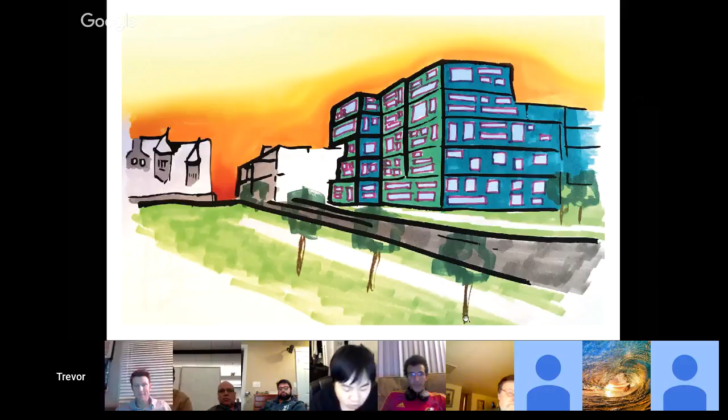Dan? Sorry? I would like the parking plan. Parking plan? Is that okay, Mark? Did we ask to look at the plan for a minute? Yeah, can you fire up the parking plan? Can you not? Oh, can you not? You have to screen share it. I mean, I know this has been a real proverbial thorn, right? You see it?

Good. So what is the outside radius of that 180-degree turn when I first come in? I'm sorry, could you repeat that? What is the outside radius of that vehicle turning in, making the 180-degree turn from the ramp? What is the outside radius?

Right here. Yes, sir. You need it in the snow, right? The tire tracks, see, in the snow—you need to account for that at those hard turns. Okay.

And my answer to that is you should know that, because you should have looked it up before you drew this. Does that make sense? Yeah. Okay, so I just think that maybe Professor Farlow and I need to have a discussion about parking fundamentals, because I think that number is maybe going to be closer to like 24 feet.

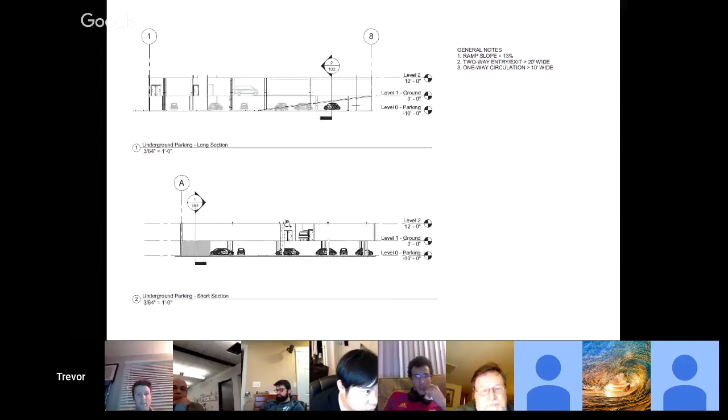We have three. What's that? Up on grade, yeah, we have currently three handicap spots right here, and then the service van here. Does that not make you nine short still?

We're still working on giving it a number. I was trying to do it without infringing on this reserved community space. Thinking back to our... go ahead. I'm just concerned that issue needs to be resolved sooner rather than later before you keep going with what you have.

Okay, Professor Farlow, am I mistaken? I can't hear that, so maybe I'll turn mine on, Trevor. Okay. Yeah, please. He's muted. Can you repeat that question, Dan?

I think because I'm seeing a shortage of at least nine parking stalls, and there still look like there could be some problematic issues with parking lot navigation and driving, I would hope that parking issue gets resolved sooner rather than later based on where we are in the semester.

Understood. Mark, would you agree? Yep. I'm sitting here looking at Ash because I was recalling our experience together last semester.

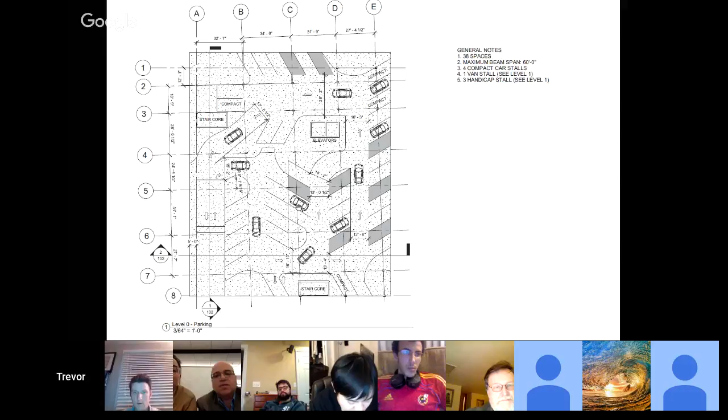This one is solved. This one is not. There will be one here. This is solved, this is solved. This is solved because he shaded this gray. Okay, yeah, D6, these bays.

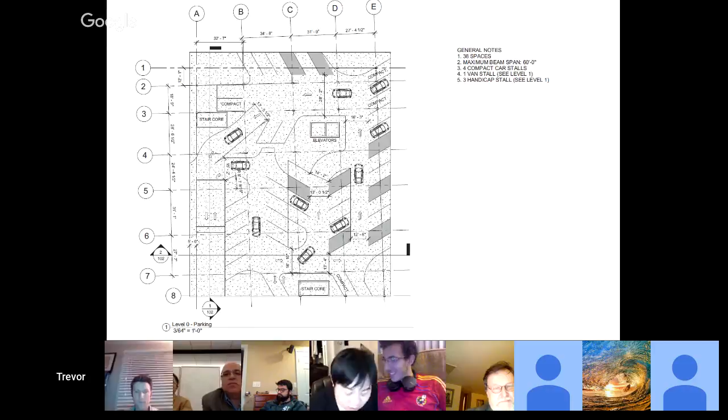So you do have the opportunity to indicate parking on the ground floor, and this is also something I've said - that some of the spaces may need to go upstairs. But when you see like 25%, or 35%, 40% of the ground floor open area being shown as open space for plantings and trees and peonies, and you're still short on parking, that's got to be an alarm that should be going off, right?

Right, so I'm counting three stalls here that I don't think are accessible based on column locations. Right, yeah, that's what Ash was just pointing out. I agree.

So I would ask, I guess, about the first floor - could we just push up like a community terrace or something, since the residential floors start on number 2 anyway? Does that become maybe a solution where we can start to park people on that space directly above, and the bottom left-hand corner would be the southwest?

The community space can go on the roof. Can go wherever we want, right? So this is just kind of me visualizing how. I never said where it had to go. I think I did say where it goes.

I did indicate that it goes on the top floor. If you look at the community space relative to the program, in terms of how the statements and plans are indicated, I think it suggests that. Now, I also think you'll have some residual, leftover ground floor space that can be planted or hardscaped for outdoor benefit.

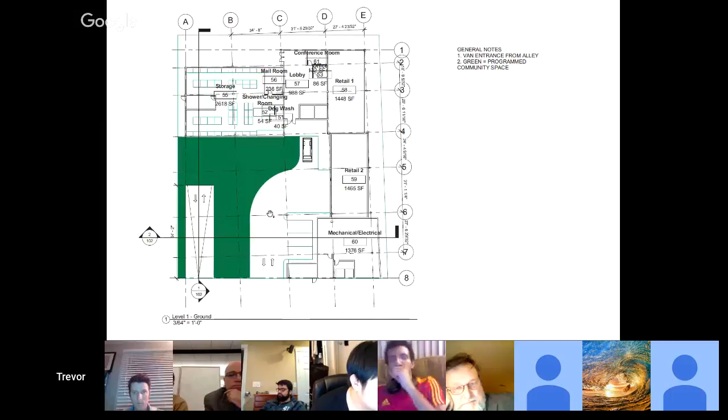I'm sorry, but when I look at the numbers, if I'm not mistaken, he has 35 stalls functional on the lower level, which means he has 15 here on that main floor with the green swatch on it. Fifteen cars have to be parked there to hit 50.

And I'm just wondering if there is going to be any green space. Well, that's what I'm saying, this is me accepting that it might go away. Yeah, there's going to be a lot less, but I think there's going to be a few more downstairs when the rubber meets the road, so to speak, when you get serious about the parking level.

Can you go to the structural columns? The 3D? Yeah. So tell me about your construction system here, the structure system, I'm sorry.

I'll do my best, because honestly this was something Alec kind of took the reins on. For the bottom floors, the underground parking, we were planning on precast concrete for the columns, and then precast, or post-tension beams, between columns that could span up to 60 feet. I thought I read that in one of the documents Professor Farlow sent us. Then we were thinking of a transition to steel on the residential floors to free up space, so steel columns and beams on floors 2 through 5.

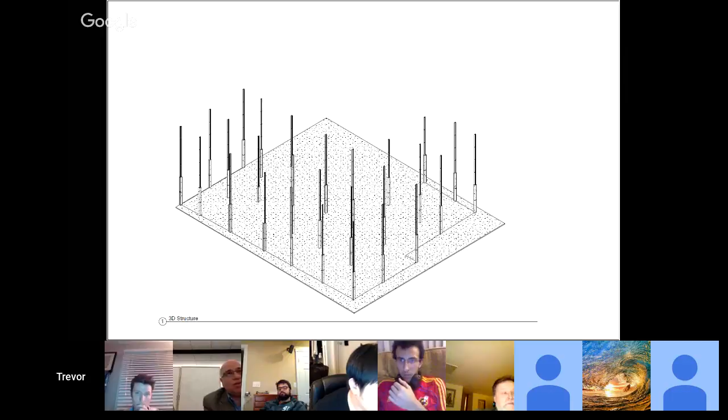Okay, so steel, on the other hand, can have a moment connection. I'm concerned pretty much about the vibrations. Okay, so site cast is very well rounded around this. If you want to do a combination, you can still use steel, but if you look at steel buildings around, the basement is still made of concrete, sort of concrete piers.

If you do a retaining wall for your parking garage, usually, if you have pilasters or protruding columns, they're made of concrete as well, and they start the steel from the first floor or just above ground. But you could also use composite steel and concrete, which gives you the continuity of the steel and a steel-to-steel connection on the upper level, and gives you the stiffness, fire rating, and durability of concrete on the lower level.

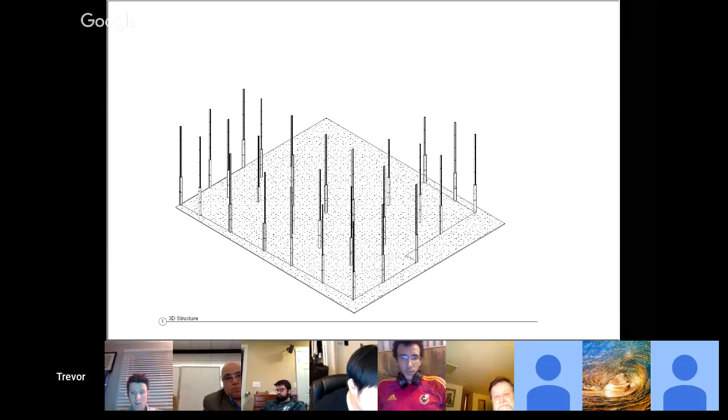And again, having concrete walls, like Professor Regeb said, for hydrostatic pressure and creating an enclosed volume at the lower level. Does that make sense? It does. So there's a steel column inside the concrete. That makes sense. And then when you get up to the next level, the steel column actually continues, and that deals with maybe some of the issues Professor Regeb's talking about, because it builds the strength, stiffness, and rigidity in the system.

Does that... the steel elements can create a longer span potential. I remember there was some discussion with Professor Farlow about post-tension and pre-tensioning, and that's not a common system. That's correct. You might have issues with how many trades know how to use that. Is that correct? That's correct. Yeah, there's probably cost premiums on that. Is that also correct?

Well, it takes longer, it takes a different skill set. We have to bring them in from Chicago or Cincinnati. They have to be here for the time they need to do that work, so they can definitely demand the cost they ask for. But it is a compelling choice because it's a more slender system. The craftsmanship is usually pretty high, and the concrete work is usually of high quality.

Here's what I like about it, that notion of sophisticated frugality, where the flooring and the ceiling are one material, like what the post-tension guys left the job site with is the finished product. You don't have to put anything but a rug down if you want, you don't have to paint it. So while it may cost more to do that, you don't necessarily have to bring in drywall and partition crews to suspend channels, put drywall in, and do incandescent or LED fixtures in that ceiling. You don't have to put another floor on it. So you may save money in other trades because you accept the sophisticated frugality of a post-tension concrete floor slab.

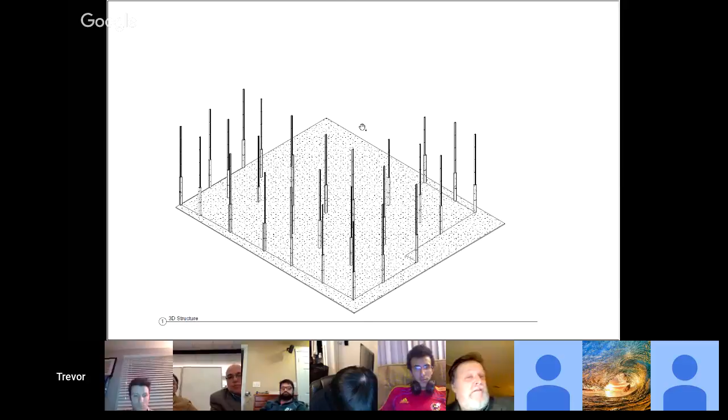that's a beautiful agenda, and we'll have that conversation soon. But I think it's also a potential agenda for the interior. So I'd assume this has a loft-like quality. It does, yeah. So that's another benefit, because you're able to get a higher ceiling, and it looks like the trendy loft that you want to live in. The one I can't afford to live in. The District Lofts, I definitely can't afford to live there. You all can go online and look at those and see what they look like.

Okay, good. Well, let me wrap up with a couple of points. One is, if you're done, Trevor. Perfect, your timing is really good tonight for a change.

So a couple of observations. One is that for the four presentations tonight, I did, unfortunately for you all, sense that there was not some marked or obvious improvement or correction of plates I saw last week. And I'm a little crestfallen about that. I don't know what that means or indicates, but spelling errors or adjustments to the drawings that I suggested last week, I would have expected you had corrected, or ways to fine-tune the drawings so they were oriented correctly, had the right graphics or the right design suggestions vis-a-vis the parking layouts. I actually expected you all to work on those drawings over this past week to get them to a state of more correctness for tonight. So I'm a little bummed, to be honest, that we didn't see that improvement over these past few days, because we have guests in the house tonight and on Thursday night, and I was excited for them to see your work in its best light. So I don't want to be bummed anymore. I want to get that off my chest.

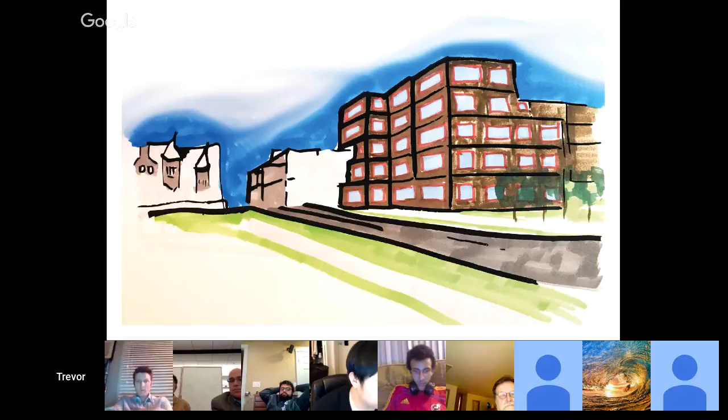If you like each other too much and you can't be hard on your classmate or teammate, find a way to be abundantly honest with them. But you have to find a way to work together to execute and implement the work.

You'd be advised to let someone own the project and become the job captain, just like in an office. We have job captains in our office who are as young as you folks, working with young people under them. It doesn't matter that she or he is as young as everyone else in the room. A project needs leadership. Mies always talked about authority never being given, it's taken. You have to take leadership.

So if there's someone in your group that you sense is a natural born leader, elect her to be the leader, elect her to be the job captain.

There's also got to be someone in the team that's the gatekeeper, who makes sure spelling errors are correct, doorways go in the right direction, and that if plans have windows in them, those plans relate to the elevations, and so on. Make sure there are north arrows on everything—even on axonometric diagrams, like I told you last week. You need someone kind of nerdy, who geeks out on making sure all the nomenclature for your drawings is there, because it helps speed the conversation along.